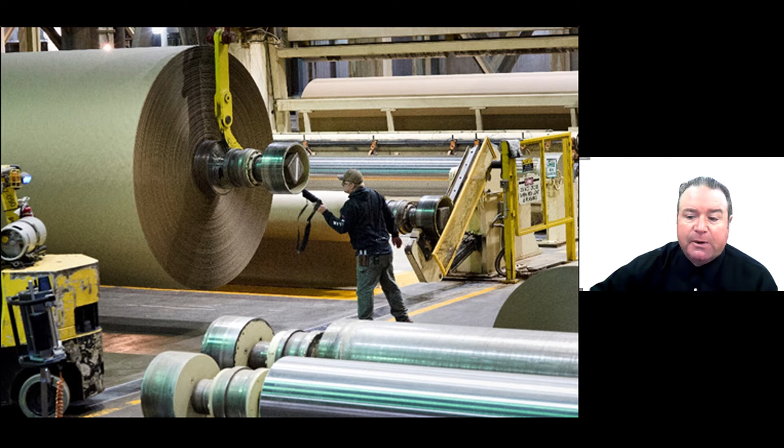We have been a proud partner in Lincoln County's economic progress since we began operating here in 1958. The product we make is containerboard, which is the brown paper and packaging boxes that are used by millions of consumers every day. The mill employs about 360 people on an annual payroll of approximately $45 million. We are also Lincoln County's biggest taxpayer, and our current tax bill is more than $3.3 million. The county's second largest taxpayer pays less than half that.

The mill is a 24-hour-a-day, 7-day-a-week operation. We produce about 2,600 tons of containerboard every day. Our product is shipped by truck and rail to factories across the nation for conversion into boxes, many of which are used to package food products. We are the leading recycler of old corrugated containers and pre-consumer box trimmings on the West Coast, currently recycling 450,000 tons a year into new containerboard.

The project that's the subject of the application you are considering is of high importance to the mill, and without it, we cannot operate efficiently or competitively. Allow me to clarify a few important points about the project. First, we wish to make it clear that the project does not involve the disposal of toxic waste, human waste, household garbage, mill garbage, or biosolids.

Second, the project area has been used for the same purpose for decades. What we are proposing is entirely consistent with the area's historic and current purpose. Finally, everything we do and plan to do is permitted and regulated by various government agencies. For example, our wastewater treatment system is governed by our National Pollutant Discharge Elimination System permit and our solid waste permit, both of which are granted by the state. We've engaged consultants, engineers, and experts, and we've invested a lot of time and resources into identifying the best way forward.

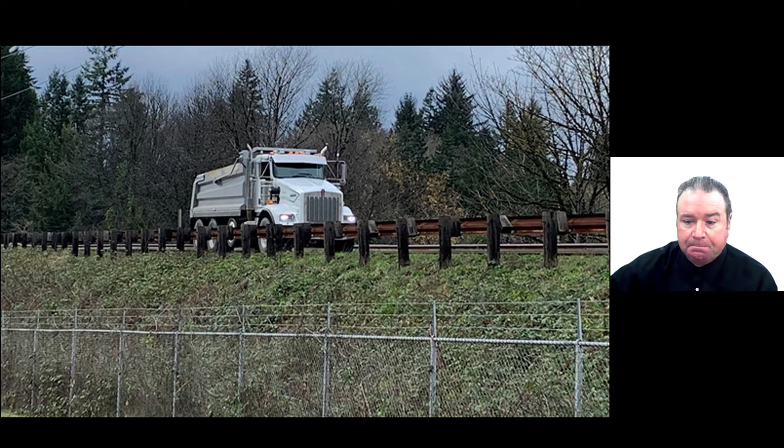We've discussed a few options and alternatives to this project, none of which is practical or effective. One option is the possibility of hauling this material to an off-site landfill. As we previously explained to you in writing, this alternative would not require county approval. In order to serve the same purpose as the project, the same 700,000 cubic yards of material that the project would dispose of on-site would need to be trucked off-site to the nearest landfill that could handle it, which is in Corvallis. This would require approximately 50,000 round trips made by trucks traveling 100 miles per trip.

As the industrial hub for Lincoln County, Toledo experiences heavier truck traffic than most communities in the region. Such traffic is consistently and historically one of the leading concerns expressed by residents and public officials who represent the community. Just as significant would be the increased carbon emissions released into the environment from such traffic. It's indisputable that this offsite trucking alternative would aggravate those concerns.

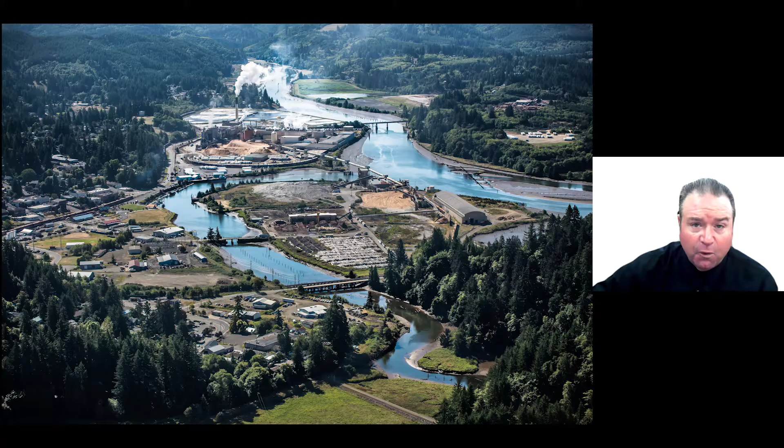Therefore, in the interest of being a good neighbor and out of respect for the environment, we strongly prefer the project to the undesirable alternative of hauling the material offsite. After much study and analysis, it's our position that the project for which we are seeking approval is the best option for everyone, the mill, the community, and the environment. In that spirit, I respectfully encourage you to support the application. Thank you for your consideration.

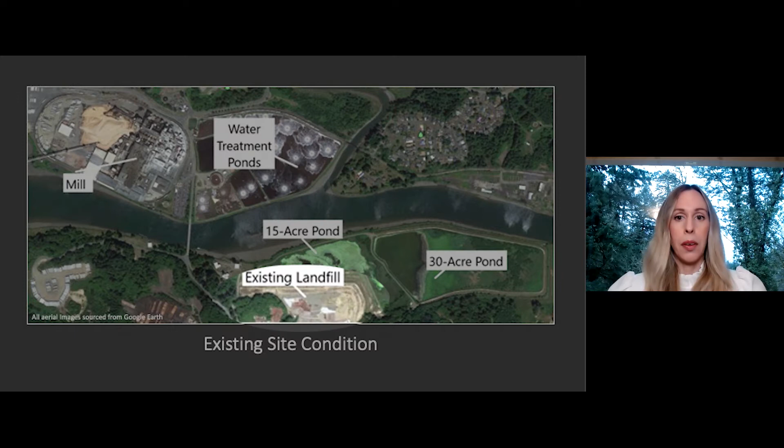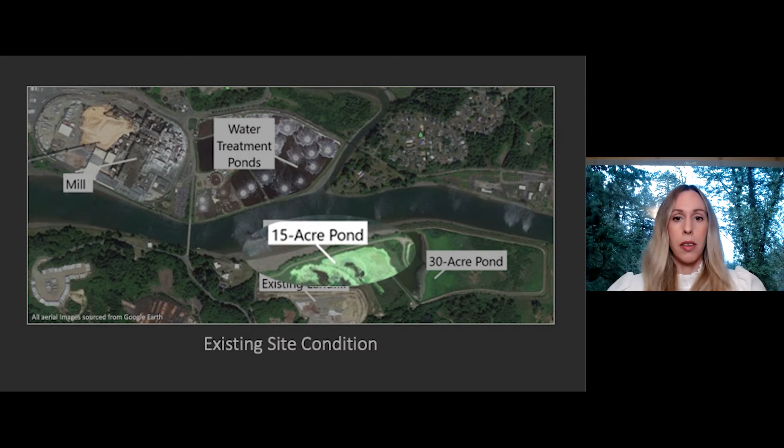This is GP's mill on the east side of the river, within the city of Toledo. These are wastewater treatment ponds associated with the mill. This is GP's existing industrial landfill area, within the county on the west side of the river. This is the 30-acre settling pond, and this is the 15-acre settling pond, which is the subject of our application today.

This aerial image shows where the proposed project will be placed on the site. This is the 30-acre settling pond, which will not change from its current configuration. Commissioners asked about the separation berm shown in the 30-acre settling pond in our original materials. That will not be added as part of the project, and we've corrected the record to show this pond will remain as it is today.

This wet area here is the remaining portion of the existing 15-acre settling pond. This area is the new cell where materials removed from the settling ponds will be stored in dry form.

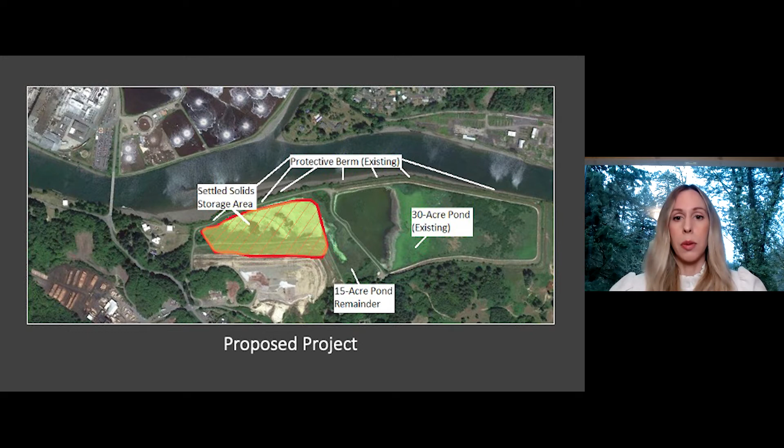To answer questions raised by commissioners, we also want to explain the purpose of the project. The mill uses water to create container board from a combination of recycled fiber, such as old corrugated containers, and wood chips. After the water is used, it is sent to a wastewater treatment area adjacent to the mill that utilizes a series of basins and treatment technologies to clean the wastewater.

A major element of the treatment process consists of separating solid residuals, the small wood and paper particles, from the water before the cleaned water can be discharged. The solid residuals build up in the treatment basins over time, requiring their removal roughly every 3 years.

This periodic basin maintenance is accomplished by sending the material from the basins to the 15 and 30-acre settling ponds, where the solids settle out from the water. Once the solids settle out, the water is returned to the basins before ultimate discharge. The settled material, referred to as sludge or settled solids, accumulates over time in the 15 and 30-acre ponds.

Eventually, inevitably, these settling ponds reach a critical solids level where the saturation of solids is too high to allow effective separation of solids from water, which is what's beginning to happen at GP's facility now. This situation has occurred through GP's normal operations at the facility and is not due to an increase in production or any changes of mill operations.

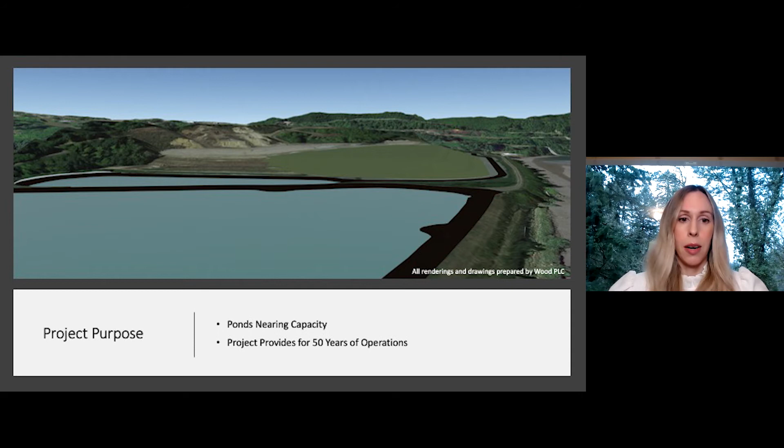We also want to touch on the regulatory framework for the project, since there were some questions from commissioners. The 15 and 30-acre ponds are part of GP's overall wastewater treatment system and were authorized several decades ago. DEQ regulates the treatment system, including the ponds, under its wastewater permitting program, and today storage of the wet settled solids within the ponds is regulated under the mill's DEQ wastewater permit.

GP's current proposal, however, is to store these same settled solids in dry form on the site, outside of a pond. When GP approached DEQ about the proposed change, DEQ determined it would regulate the settled solids in the new storage area as solid waste, by adding a cell to the existing landfill, which DEQ also regulates.

Importantly, whether under DEQ's wastewater program or DEQ's solid waste program, the agency will ultimately maintain regulatory oversight over the project's design and implementation, thereby ensuring it poses no risk to human health or the environment.

As a prerequisite to DEQ modifying GP's existing landfill permit to add the solids area, DEQ requires us to obtain local land use approvals first from you. However, permitting from DEQ must also be completed before the project can ultimately move forward.

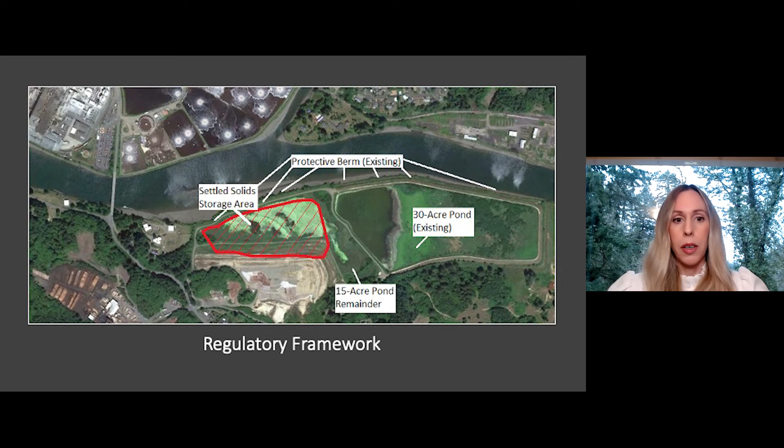We also think it's important to discuss the alternative: what happens if GP cannot move forward with the project as proposed? If the project is not approved, GP could instead transport the settled solids offsite to the closest existing solid waste facility permitted by DEQ to accept this material, which is in Corvallis. This alternative would not require county land use permits and would not fall under this commission's jurisdiction.

To provide the same operational capacity as the project—50 years of pond operations, the same 700,000 cubic yards of settled solids that the project would handle on-site—would instead need to be trucked to the Corvallis landfill. This would require approximately 50,000 round trips made by trucks traveling 100 miles per trip during the 50-year project period.

This offsite alternative would still require removal of the settled solids from the wastewater treatment ponds, which will include some of the same potential for noise, odor, and visual impacts as the project, and would leave the existing 15 and 30-acre ponds, which contain settled solids and water, in place adjacent to the river. As explained earlier, the project will avoid the significant traffic and carbon emission impacts associated with offsite hauling, and is therefore a strongly preferred alternative for the environment and the community.

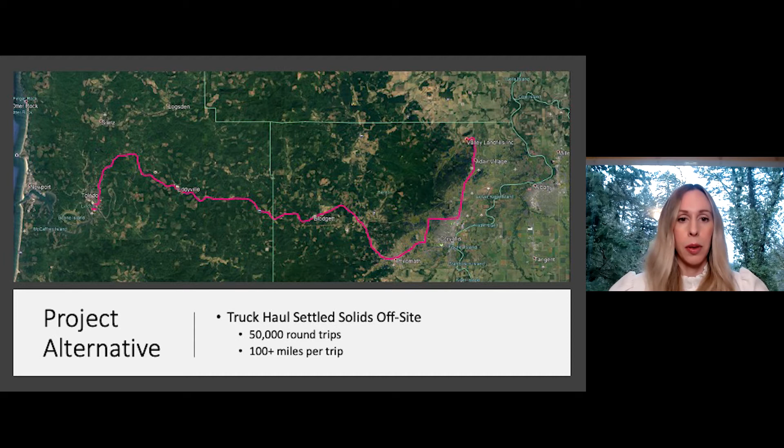I'll now turn this over to Christy Deitman with Wood to discuss a further evaluation of the solids material that we put together in response to the Commission's questions.

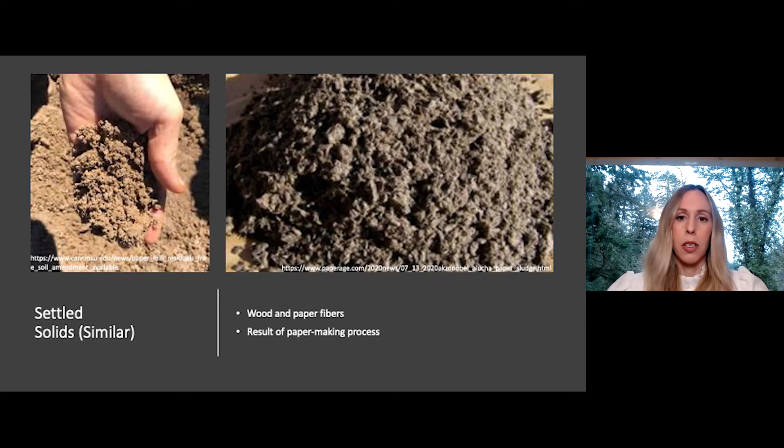Wood collected samples of the settled solids for laboratory testing of 8 metals and 19 chemical substances known as polycyclic aromatic hydrocarbons, or PAHs, that are likely to be present in settled solids. PAHs are typically produced from incomplete combustion of wood or other fossil fuel sources and can be found naturally in the environment, as are metals.

The samples we collected were from multiple locations and depths across the ponds to evaluate the solids that have accumulated in the 30-acre pond over time. We compared the detected metals and PAHs against published human health and ecological risk screening criteria. The human health screening criteria were selected to evaluate the settled solids in its current disposition upland, and the ecological screening criteria were selected to evaluate a hypothetical release of the solids to the river.

The PAHs that were detected do not exceed the occupational and construction worker levels, meaning they do not pose a risk to anyone working in or around the solids. The concentration of benzo(a)pyrene at one sampling location slightly exceeded residential leaching to groundwater levels. However, the existing ponds include a protective clay lining to prevent releases to groundwater. This liner will remain and protect against any leaching from the settled solids area.

No individually detected PAHs exceeded the most conservative published state of Oregon ecological risk screening criteria, which could be applied to ecosystems found in the river.

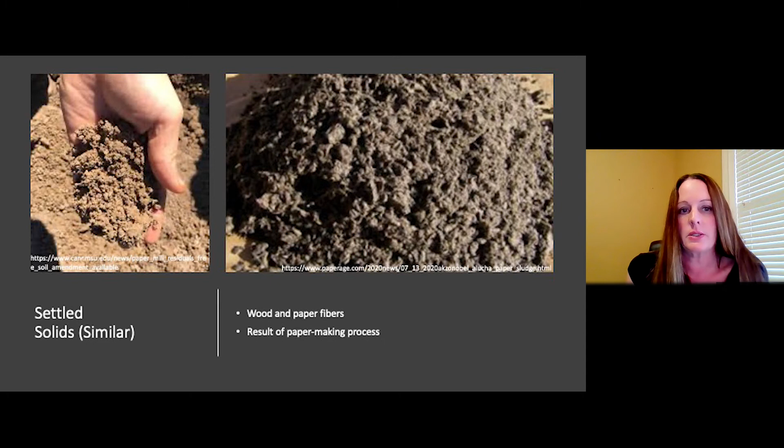With these protections incorporated, the project does not pose a risk to human health or ecological receptors.

Thank you, Christy. Next, we want to discuss the protective measures Christy alluded to that are included as part of the project and ensure that the settled solids will not reach groundwater or the river.

Groundwater is protected from contact with the solids by an existing clay lining in the ponds. GP will retain that lining in the storage area. The lining prevents any moisture that could accumulate in the solids from infiltrating groundwater.

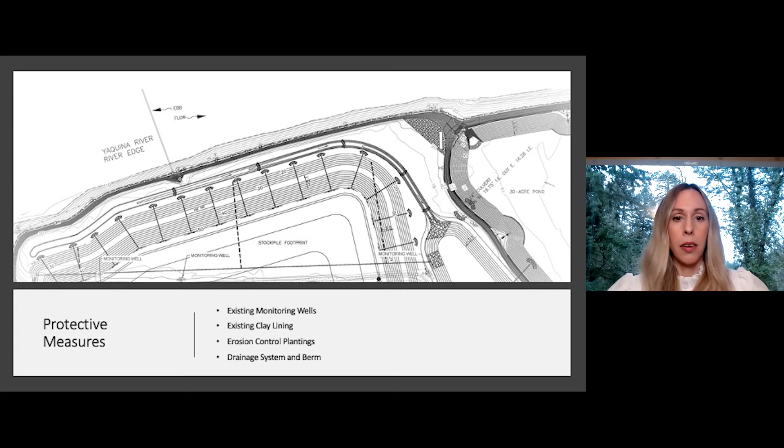Stormwater that runs off of the storage area will be captured by the site's extensive drainage system and sent back to the wastewater treatment area. The berm is an additional physical barrier between the solids and the river and prevents runoff water from reaching the river.

Next, we want to address commissioner questions about project construction. Construction periods, when settled solids are removed from the ponds and placed in the dry storage area, will never last more than 6 months, though GP anticipates a more likely timeframe is actually 3 to 4 months each time.

Construction phases will occur roughly 10 years apart during the 50-year project timeframe. GP will also continue its current maintenance of the wastewater treatment ponds between phases.

This maintenance, also referred to as dredging, involves removing solids from the wastewater treatment ponds and placing them into the 15 and 30-acre ponds approximately every 3 years, which occurs today. This maintenance activity is ongoing and will not be impacted by the project.

The initial construction will involve draining both ponds and preparing the solid storage area. Solids will be removed from the settling ponds, dried, and stacked in the storage area, and GP will then plant grass on the area to control erosion.

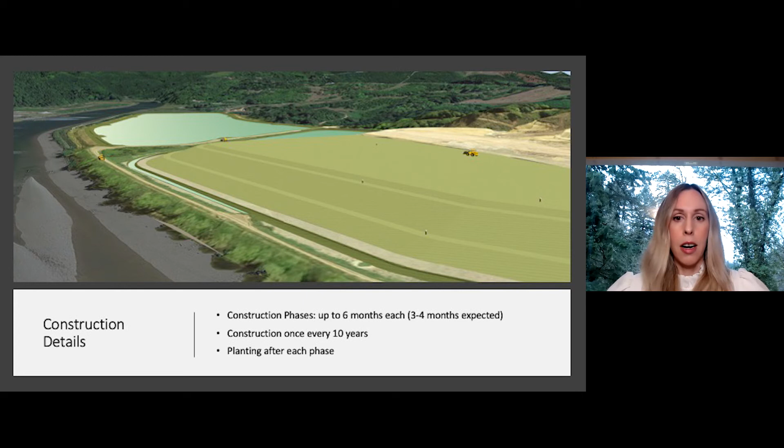Commissioners also raised concerns about whether the project is suitable for the site. The question of suitability must evaluate the difference between the existing use on the site and what is proposed. Here, the exact settled solids material that exists in the 15-acre pond will still be placed in that same area. The only difference is that the material is wet today, but will be dry after the project is completed.

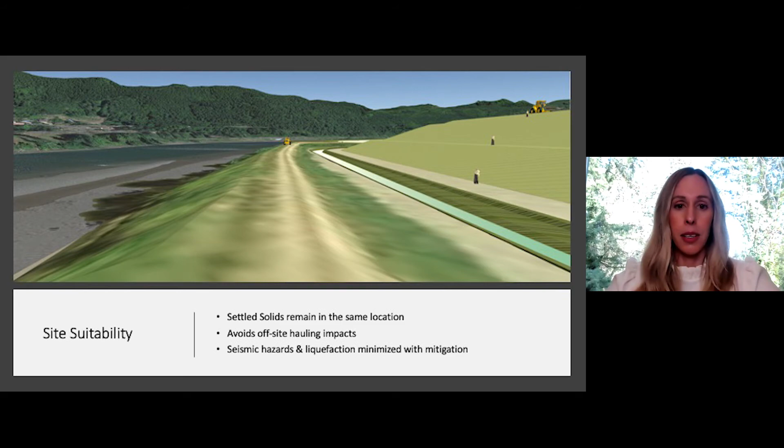We recognize, however, that seismic hazards at the site, which are present along the entire Oregon coast, combined with the site's proximity to the river, raise suitability concerns for the Commission. I'm now going to turn this over to Don Dotson with Wood to discuss the additional seismic analysis we conducted and the mitigation we are proposing to ensure the settled solids will not enter the river, even during a catastrophic Cascadia earthquake event. Thank you, Allison.

Let's talk a little bit about the geotechnical and the earthquake and seismic parts of this project. We've gone out and done some exploration, conducted lab tests, done analyses, and we've broken the project up into 3 reaches based upon the subsurface conditions and also based on the geometry of the berm at these particular locations. So we've broken it up into reach 1, reach 2, and reach 3.

And then we've looked at the seismic events that are likely based upon the geology of the area, specifically the Cascadia magnitude earthquakes. For this particular project, most of the project will be in the area of reach 1 and reach 2, but we went ahead and evaluated reach 3 as well, just for completeness.

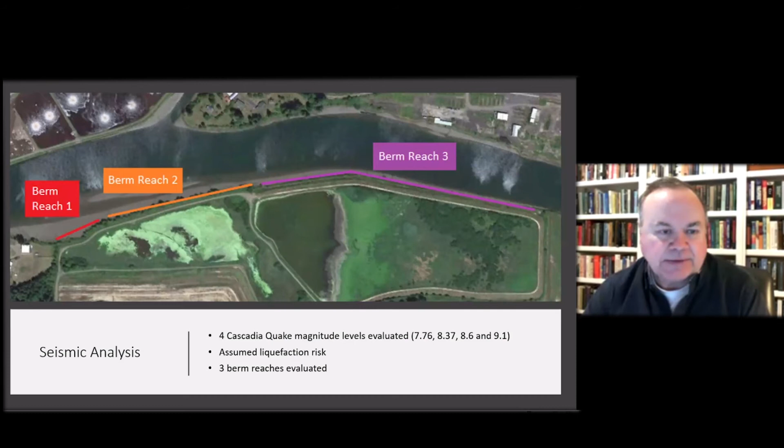So let's take a look at the geometry of the project. Here we have a view looking upriver to the west, to the east. Notice that out here in the river, we've got a sandbar, and we've got the toe of the berm down here at about the same elevation as the sandbar.

It goes up at an inclination of about 3 to 1, something like that. And the distance from the toe of the berm where it meets the river and the top, or crest, of the berm where the road is, is about 70 feet.

And then this is important. We've got a buffer zone that's about 75 feet from the top of the berm out to the toe of the proposed solid area, which already exists, but we're going to be adding to it. And from there, going up to the crest, we're at a little bit over 200 feet.

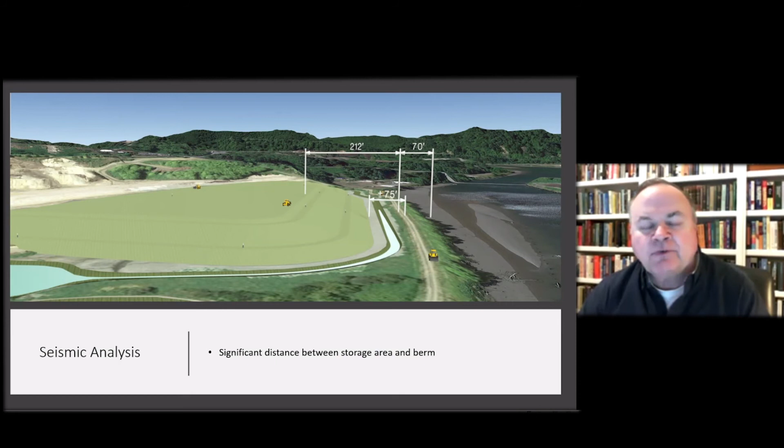And the important thing about this particular geometry is that the crest of the solids is far enough away from the berm that it really doesn't have an impact on the stability of the berm.

So let's look at some of these reaches and get into some more detail about what the earthquake could be doing to these particular berms. We looked at 4 different earthquakes, all Cascadia events. We looked at an event that would be a fairly small event, 7.76 magnitude earthquake, all the way up to a full Cascadia 9.1 event.

And we have different return periods for these earthquakes. A return period is the amount of time that you would expect in between these events to occur. So for example, a 250-year earthquake would be the size of earthquake that you would expect once every 250 years. And the same all the way up to the 2,500-year earthquake, that you would expect to happen at least once every 2,500 years.

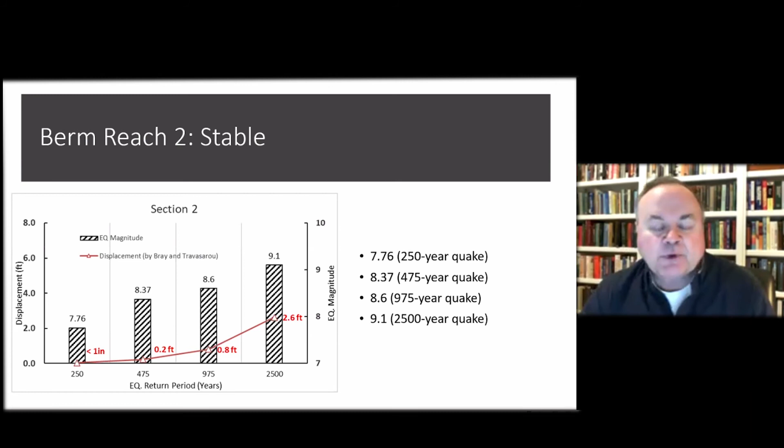The full Cascadia event, the 2,500-year event, has a little bit more deformation, all the way up to 2.6 feet versus 2.2. But still, that's within an acceptable limit, given the amount of freeboard, the distance from the surface of the solids up to the top of the berm that we have — not a problem.

But if we go to section 1, section 1 is the least stable and has the worst subsurface conditions that we observed when we did our exploration. And so the 2,500-year event has a deformation of all the way up to about 6 feet. This is a little excessive, so we're probably going to have to do some mitigation to take that into account and fix that.

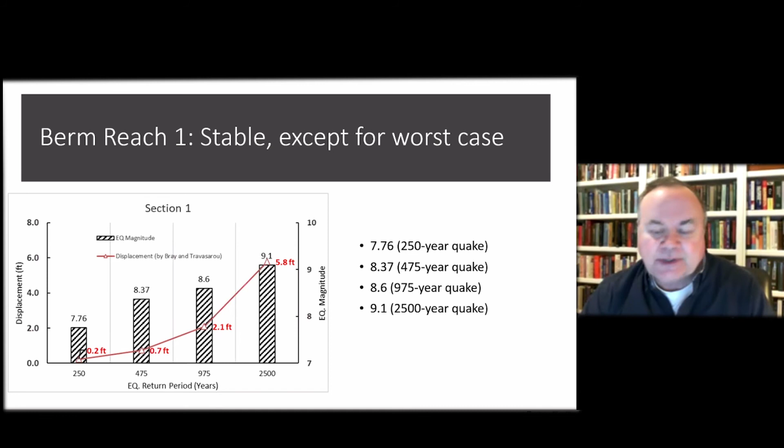So let's talk a little bit about the different methods we can use to mitigate this problem. Here's a cross section that shows the solids, the berm, and this circular line here that goes all the way out to the river is the most probable line of deformation, or line of weakness, that we have in the soil. This is where we would expect to see a rotation and a displacement of a couple of feet.

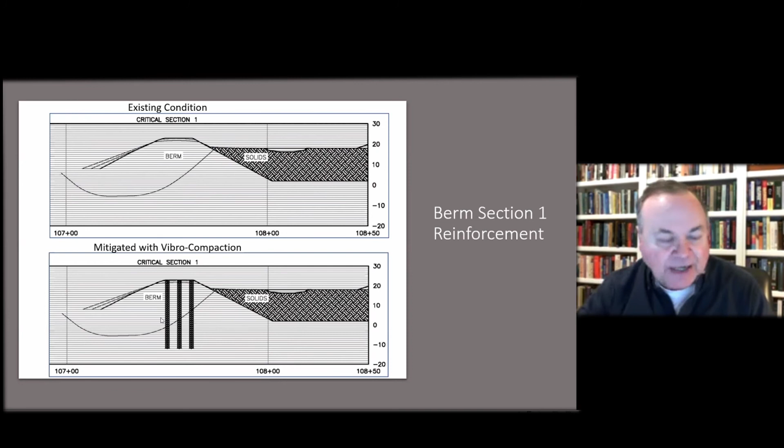As the earthquake hits, the way to mitigate that is to insert these structural elements here. I'm showing 3 just for illustrative purposes — we would have to determine the exact number by doing the full design. We intersect the failure plane and cut off the ability of this particular rotational area to actually rotate during an earthquake event.

So here's the method that we do. We're going to use a technique called vibro compaction, sometimes called vibro replacement. There are lots of different variations on this one particular construction technique to improve the strength of the ground. We'll do this in accordance with the Oregon Department of Transportation seismic mitigation guidelines.

So let's run a little film here, and I'll talk about it as we go through. It shows how this works. So we have a piece of equipment — this is a crane, and the equipment being lowered into the ground is called a vibro flot. The vibro flot has an eccentric motor in there that causes it to vibrate at a high frequency, and as it's lowered into the ground, it actually pushes the soil out of the way.

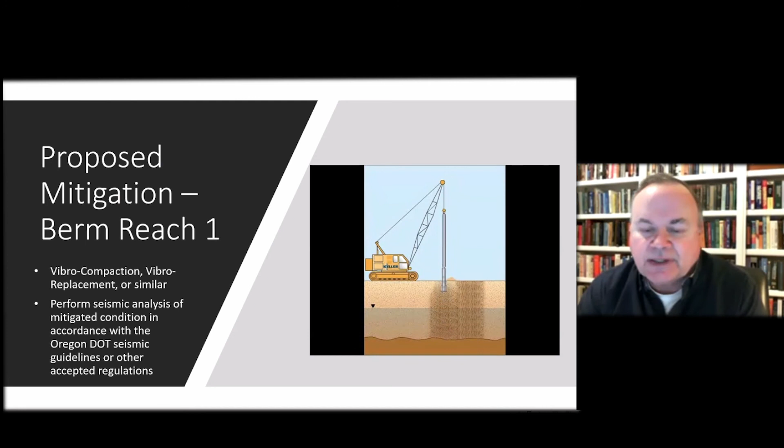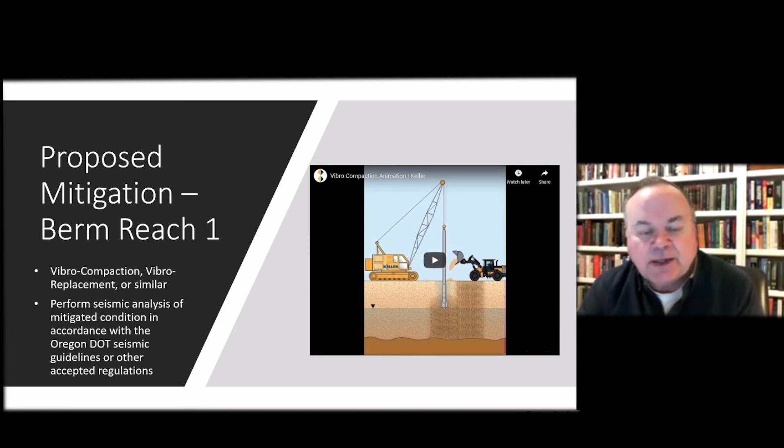And then they bring in additional soil, in this case sand, and the sand is allowed to drop into the hole. The vibro flot will go back down and strengthen the sand, improving the ground and preventing the rotation and deformation that we've been discussing.

Thank you, Don. We are planning to include this seismic mitigation as part of the project, but recognize the Commission may wish to condition the project's approval on this mitigation being completed. We would accept a condition of approval setting a maximum deformation for berm reach 1. We've included language for a proposed condition of approval in our written materials and also shared this with county staff.

So finally, we want to address questions about the potential for odors, dust, noise, and visual impacts from the project.

Regarding odors, the settled solids are composed of wood and paper particles. As is true for all organic materials, the solids can produce odors when disturbed. The project has the potential to emit odors as the solids are removed from the ponds and relocated to the storage area during construction. This potential for odor already exists every 3 years when the solids material is removed from the wastewater treatment ponds and placed in the 15 and 30 acre ponds.

The mill notifies residents when this maintenance activity occurs and encourages citizens to notify the mill of any odor concerns. The mill maintains a 24-hour call-in number for mill-related concerns of any kind, which will be maintained. If odors occur as part of this project, GP will treat the material with BioWish odor control, a biologic designed for odor treatment of the types of solids found in the ponds.

Regarding dust, GP does not anticipate this project will create dust since the settled solids are wet and once dried will be planted with grass. However, construction vehicles may create dust coming to and from the site. GP uses water sprayers to control dust for all of its operations and will utilize these for the project as needed.

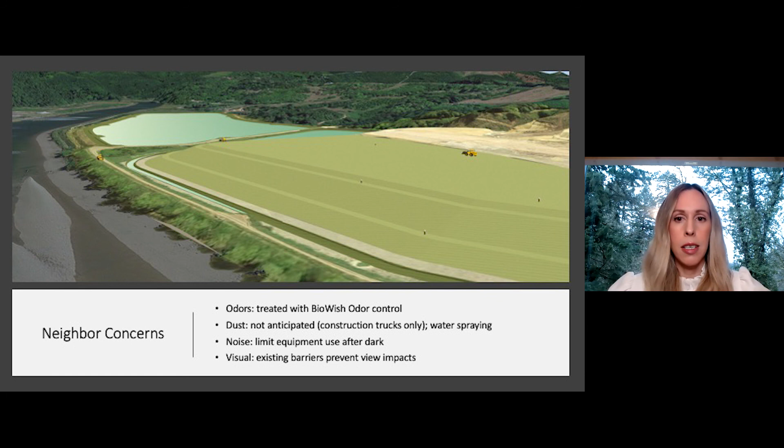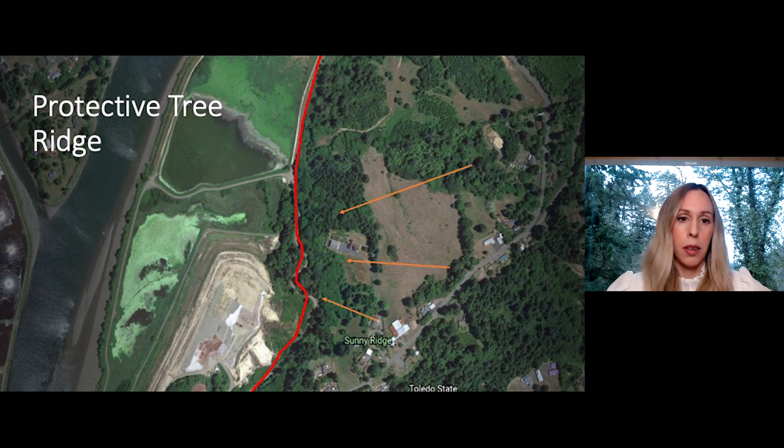An existing row of trees shown here blocks views of the existing landfill area and will also block the project site from the homes in this vicinity. Homes in this area are shielded both by the trees and an elevation difference. The homes are at a higher elevation than the project, which further obscures the view.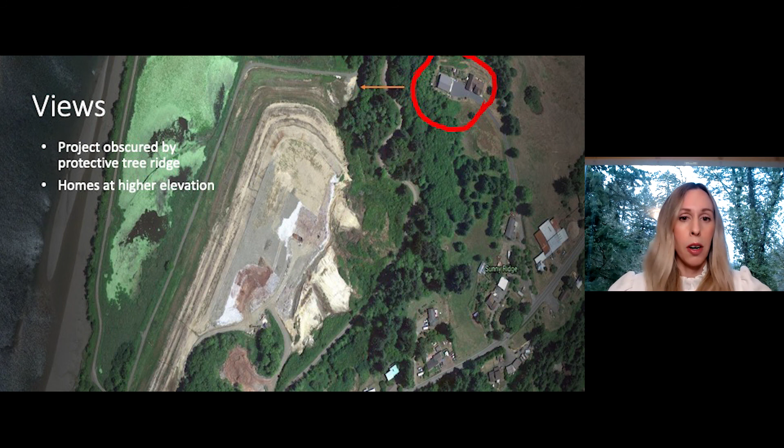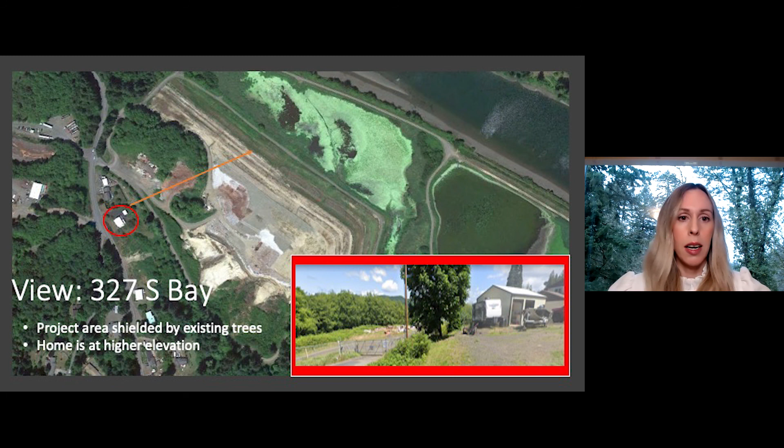We also captured views from nearby individual homes near the site. This photograph shows the view from the home at 327 South Bay. This home, like others in its vicinity, is shielded by existing trees and the home is at a higher elevation, which obscures the project from view.

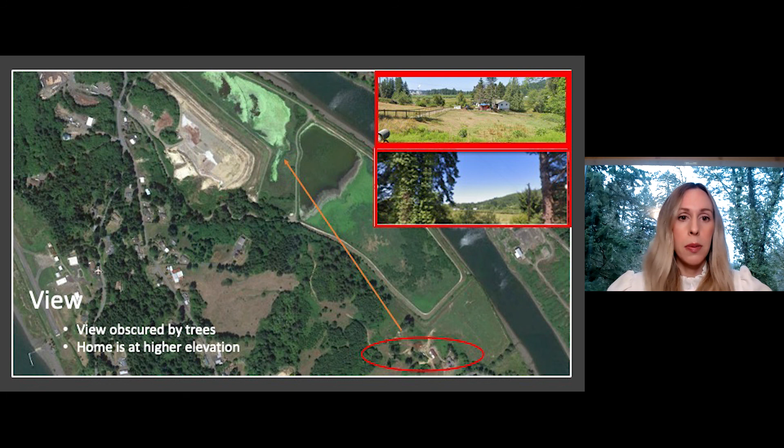This photograph shows the view from a home which is similar to others in its vicinity. The project is obscured by trees and the home is at a higher elevation, further blocking views of the project.

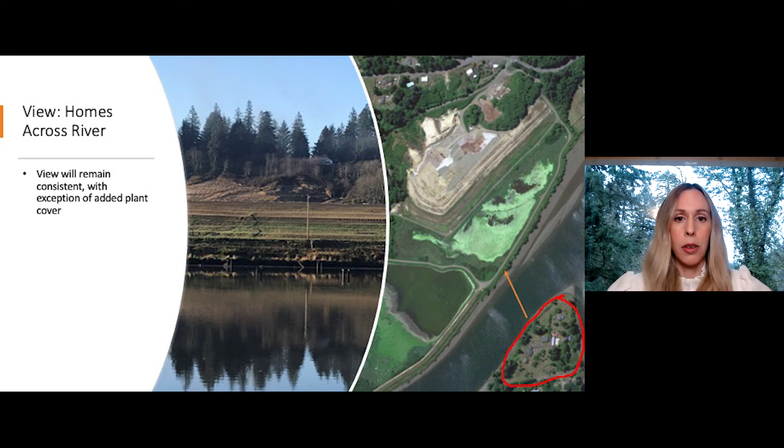Finally, there are several homes located across the river from the project. Views from this area are at grade. Although screening isn't possible because it could compromise the integrity of the berm to plant trees in that area, the view itself from these homes will not change significantly with the project. The settled solids will be terraced and appear almost identical to the view today, but with added grass cover.

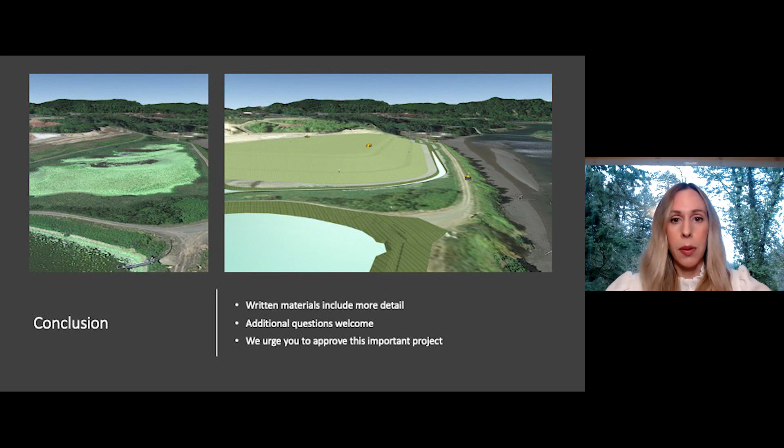In conclusion, thank you for the opportunity to present this information. We hope we've helped answer your questions, and we also urge you to review our written submission, which includes responses to all questions during the last hearing. We've spent many months analyzing all available options, and we firmly believe the project is the best solution for all concerned, the community, the company, and the environment. We urge your support and welcome any additional questions you might have.